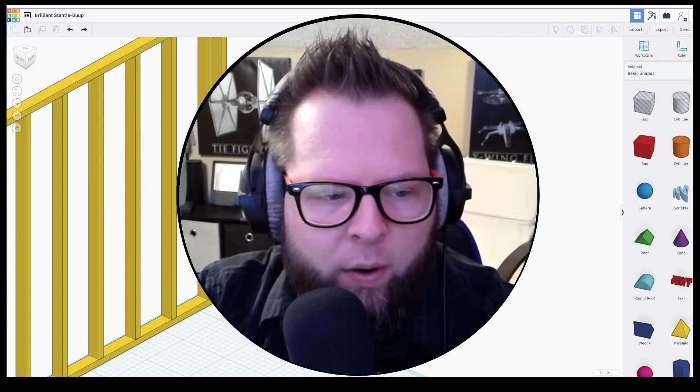What we're going to do is a real simple door opening. We're not going to focus too much on dimensions in this video. I'm just going to do a basic opening, assuming maybe I'll build my own door or have my own plan for how I'm going to cover that. So let's go ahead and get into our door.

I'm going to go ahead and illustrate something for you real quick. If you did what I did in video 1, where I tried to demonstrate the different view options, you see over here on the left you can switch between perspective and orthographic. I'm in orthographic view right now.

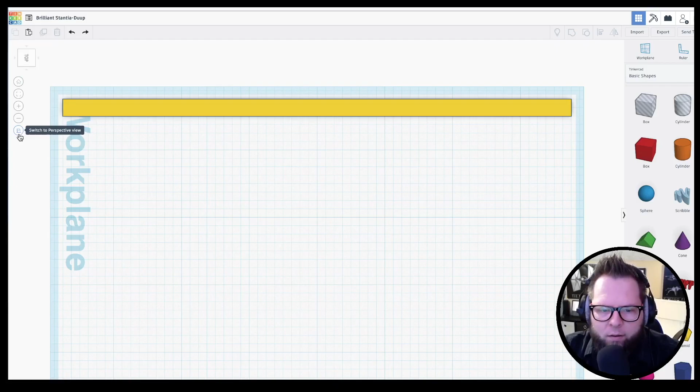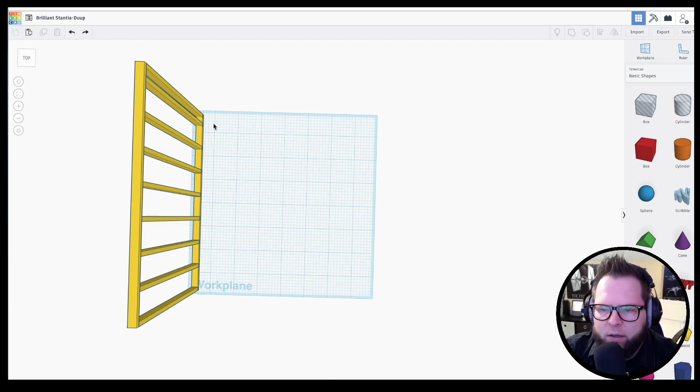If I were to change that right now, look at that—it's like I'm hovering over it, like I'm floating in the air over top. I think I illustrated that a bit in the first video, but it's become so much more obvious now that we're dealing with more height. It'd be very difficult to line things up and tell that this board on top is actually bigger than, or the same as, the board at the bottom. Our brain tricks us with perspective into knowing that's closer and that's further away. But we want everything to line up correctly without relying on our eye for that. So I'll switch to orthographic view, and you can see it doesn't matter where I'm viewing it from.

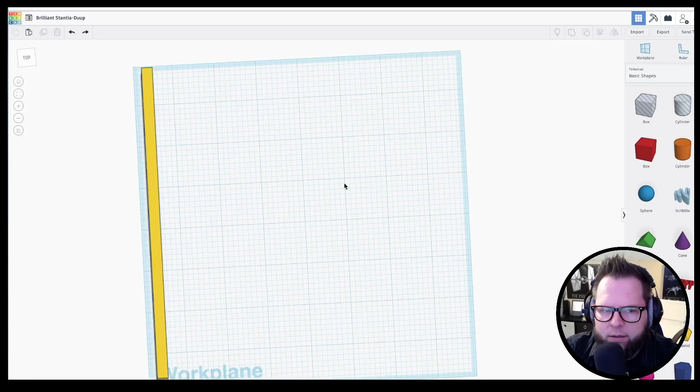Now, if I'm viewing at an angle, yeah, it's going to look a little weird. But when using top, right, or left views, orthographic is going to be so much better for us.

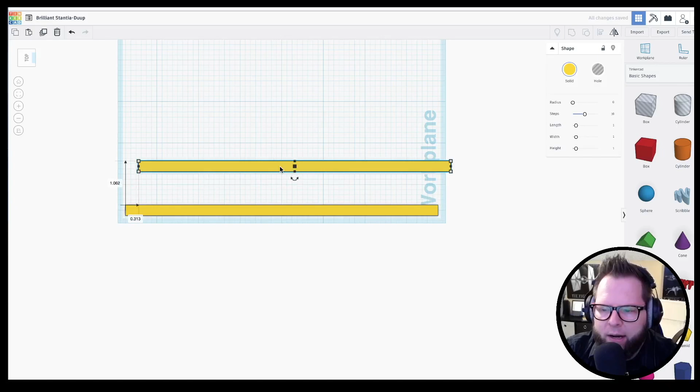First thing you want to do is go ahead and highlight the whole thing. Remember, these are still separate pieces, so if I were to click and drag just a single piece, I'd leave all these other pieces behind.

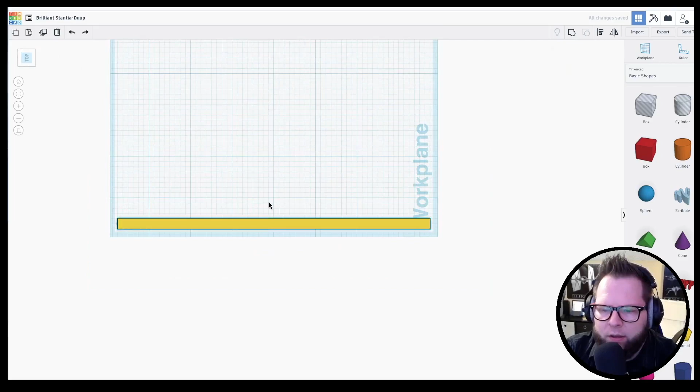Oh, looks like I have a duplicate there. Wow, that was an interesting surprise. I'll delete that, I don't need that. Yeah, that's what should have happened. I'll undo with Control Z. So again, I'll highlight the whole thing and then click duplicate.

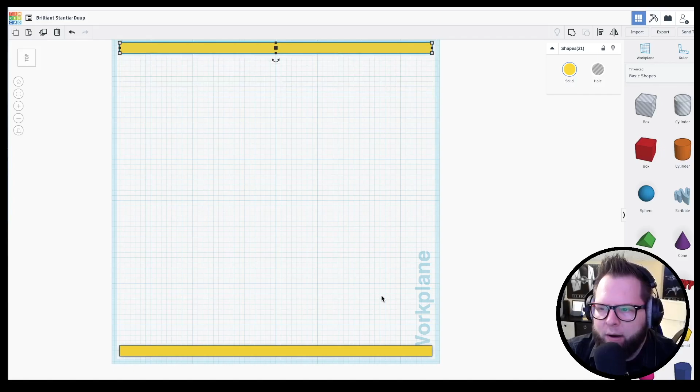Then I'm just going to use my arrow keys and push it over. I'm not going to go left and right, just up and down, because I'm going to use this wall on the other side. It'll probably end up around there—I might need to move it when I'm done to get it in the right spot.

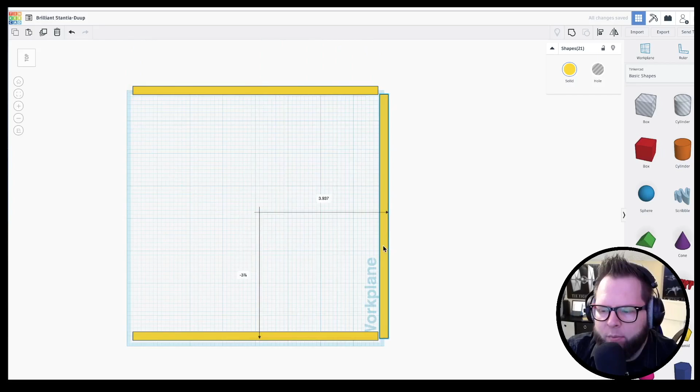I'll go ahead and highlight this and duplicate it as well, then change the angle to 90 degrees. Now I'm just going to click and drag and butt it up against this wall right here. Oh, before I do that—oh no, it's still all selected, so we're good. I'm going to change the color of it to, I don't know, how about this brownish color?

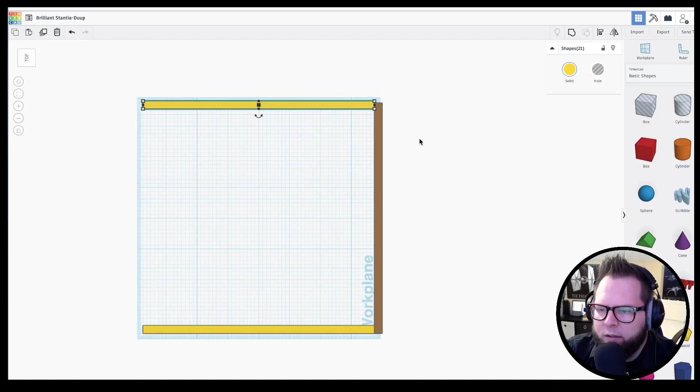Yeah, that's cool. I'll highlight this one right here and move it like right there. Perfect—so that's how my walls are going to butt up to each other.

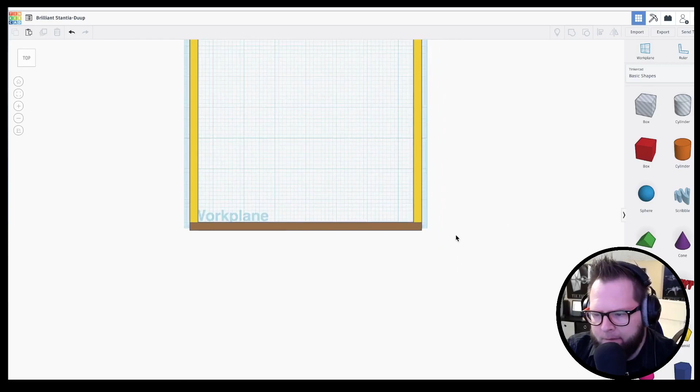Actually, I wanted this wall—I wanted that half stud, or that half distance kind of thing, off on the other side. So let me highlight just that one. If I go to there, it should highlight. Yep. Then I'm going to rotate again. Ooh, right here—if I just type in 180 and push enter, it rotated. So now that stud that's closer is over there.

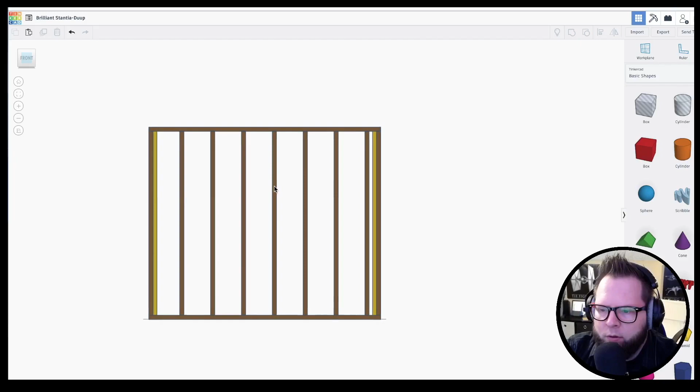Let me go to the front view and zoom in a little here for you all to see. Now on my paper, I have that little half stud on the right. I keep calling it half stud—the stud that is closest to the end stud is off to the right, and so I want it to match what I have on paper.

So if I count, I have that one, and this one is in the same spot. The 3 on the right are going to stay where they're at. The one all the way to the left, I'm going to keep it where it's at. The second one stays where it's at. The third one, this one gets moved over.

Now I'm not exactly sure where it gets moved over to. Did I duplicate this again? There's like an extra of each in there. That would be weird. Yeah, there is. Oh my goodness. So I'll just select. Okay, there isn't of that. I bet I did that when I built the thing.

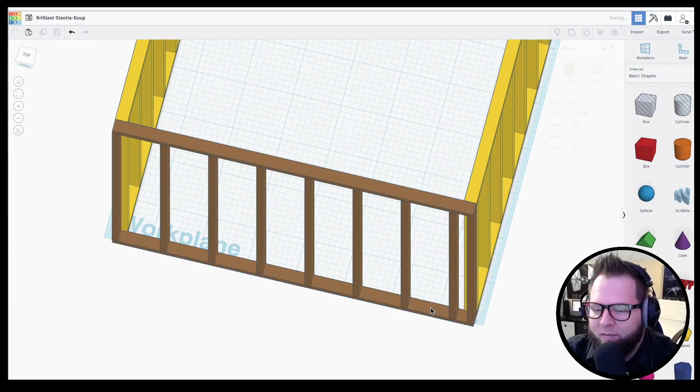There's like duplicates hidden in there. Okay, there's a hiding one. Is there one in here? Yep, there's a hiding one. Is there one in here? Yep, I must have hit duplicate. How about this one? Yep. Okay, how about the bottom plate? No. Oh yep, yep, okay. I bet that happened to this one over here too. Do I have a duplicate in it? Yeah, I do. It's okay, it's not going to make a difference.

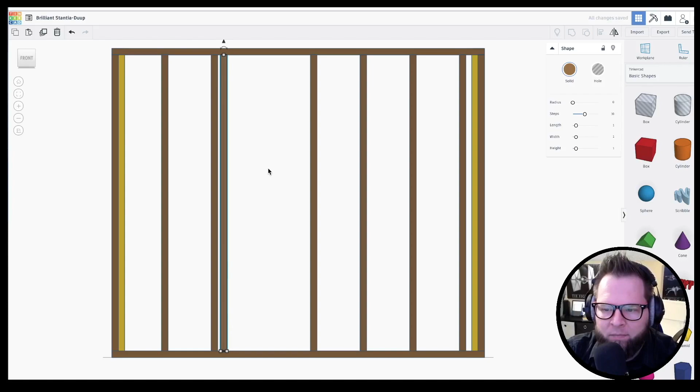So what I was about to say was that these 3 on the left, this one of course stays where it is. That one stays where they're at, and this one is going to have to move. So I'm going to move it over. I don't know exactly yet how close it needs to be. I'm going to get rid of this one, and then that one stays right where it is. So actually that looks pretty darn close. I think this one was only 2 inches. Yeah, I think that's exactly where it's supposed to go.

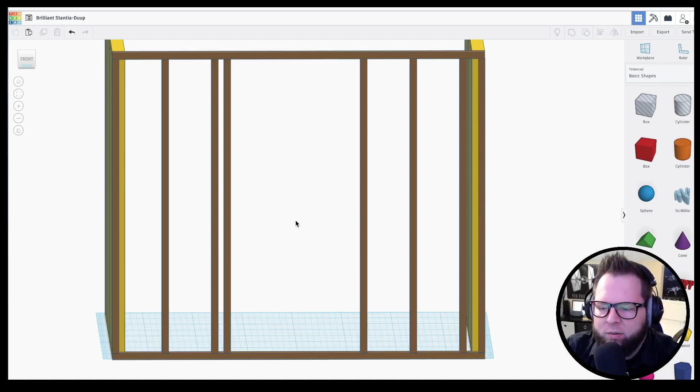So like I said, we're not going to spend too much time on scale and measurement, and really just kind of give you an idea of how we might frame a door. So we would say, okay, well, we want this door here, and now I need to add a header, and I also need to add some trimmers and maybe some stuff for framing in the door.

All right, so the thing I'm going to do is I'm going to go down here and click that one. I'm going to say duplicate. Don't use your arrow keys on this part. You're going to need to click that little cone and drag it up, and we'll figure out. Now the way I'm going to do this one is I'm actually going to change this distance here to like 2.5. Yeah, and I think 2.5 is probably decent for a door.

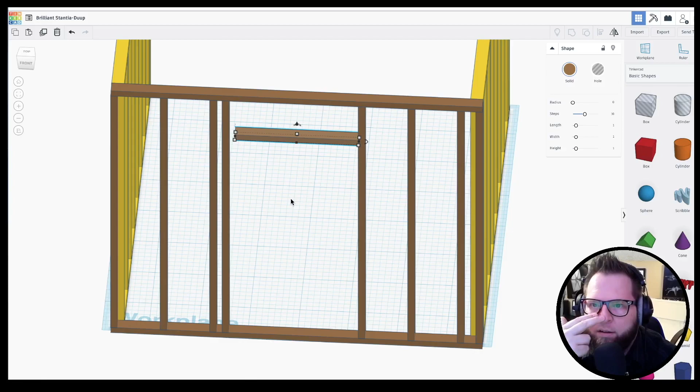2.5 inches in... 2.5. Well, that would be 32 plus 8, that's like 40 inches. So I think that's like a 40-inch opening, if I did the math right. And so I think that's about the width that I want. So I'll go ahead and bring this guy in to where it should go.

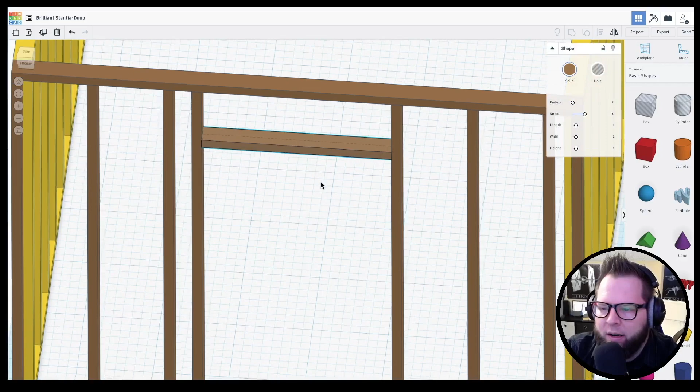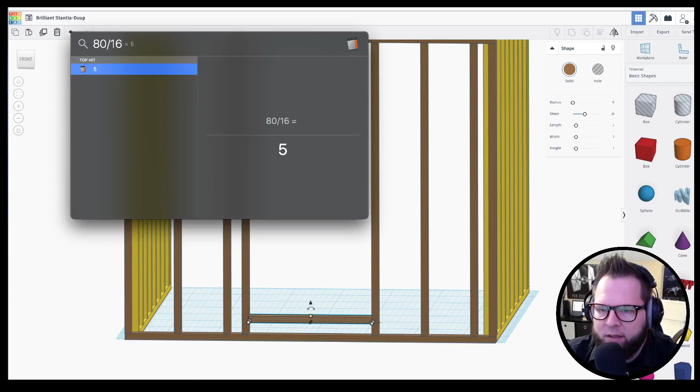There we go. Okay, and now I want to have some 2x6s. I got to get the height right as well. I'm going to say I want the height to be 80 inches. So what's 80 over 16? 5, because a 16th is an inch, so it's 5 feet. Okay, so I'm going to have it.

So if I push D, it's at the bottom. Then if I click this little cone, not the rotate part, if I click this little cone, you'll notice it's measuring from the ground right here. So I'll say 5 feet... is not 5 inches. 5 feet, I would need to take that... no, I need it more than 5 feet. 80 inches and 16ths, I already did the conversion.

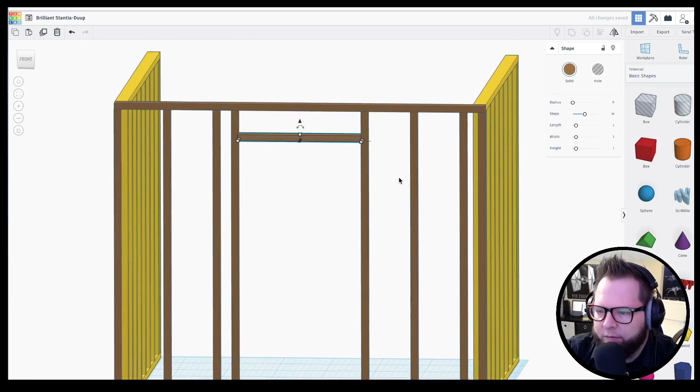So I think that I want it to be a little bit higher than that, though. I think that's about where it's supposed to be, 5.5, to be honest. I can always go to my paper, and actually that's probably what you should do if you have a paper, just measure it and then put in the dimensions that you have on your paper here on the program. All right, so let's view it face on.

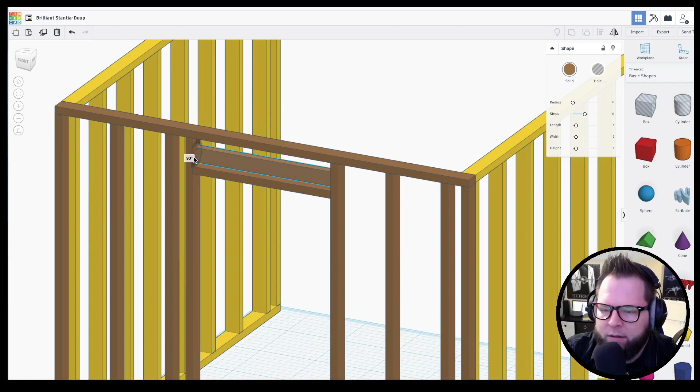Okay, I'm going to duplicate this guy. So I got this one selected. I'll duplicate it. I'm going to pull it up just a little bit so I can work with it. I'm going to zoom in a little bit and then change my angle. And I want to change its orientation by 90 degrees, just like that. Okay, looking good so far.

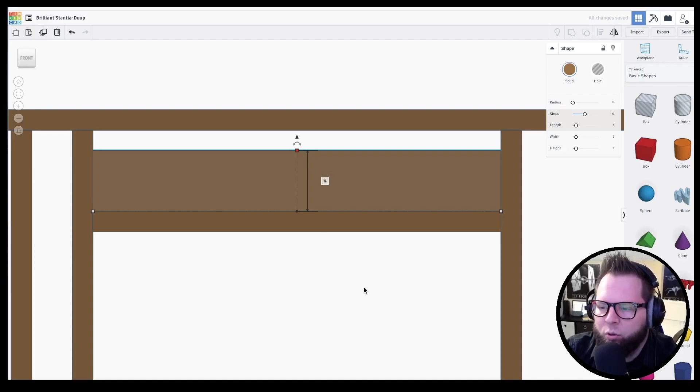Now, if a 2x4, remember each 16th represents a real inch. If a 2x4 is 1/4, which is 4/16, then a 2x6 would be, I'm just going to go like that, would be 3/8. Okay, so that's a 2x6. And the reason I'm using a 2x6 like that is it's going to be much stronger in that orientation.

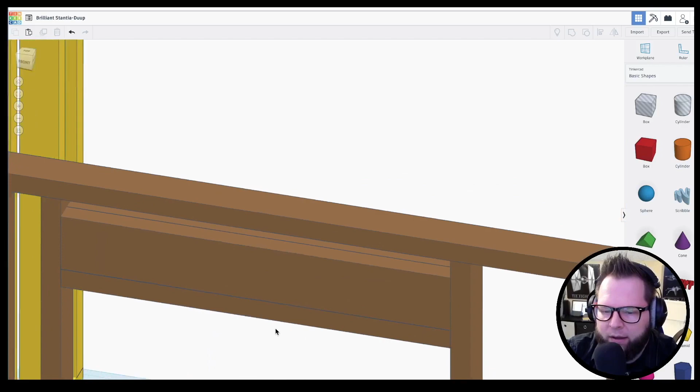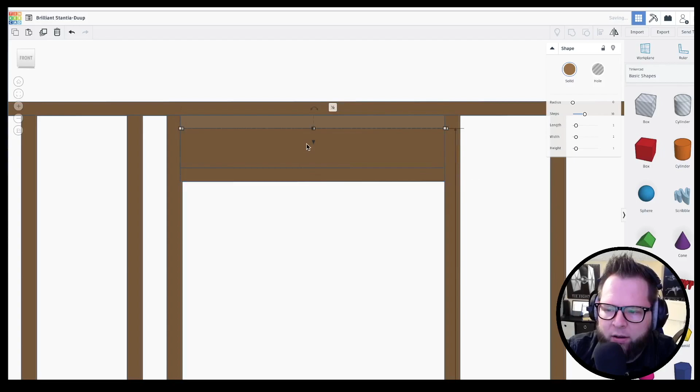Okay, so I have a 2x6 like this. I'm going to duplicate it, and I should have another 2x6 as well, so you have those two 2x6s butted up against each other, and they're going to be strong that way. Now, if I ended up with a lot more room between the header and the top plate, I might use some cripple studs, small studs to put in there. But it looks like it's almost exactly a 2x4 width, so I'll just duplicate this and bring it up there. And look at that, it fits almost exactly. It actually does fit exactly.

So that's how I would probably frame it on the job site, since it's going to have to transfer the weight from this top plate down into that header. Notice that right now that header's not resting on this 2x4 right here, which is part of the framing for the door. That would be nailed in from the other side of this stud, but we don't want nails holding the weight. We want the wood to be holding the weight.

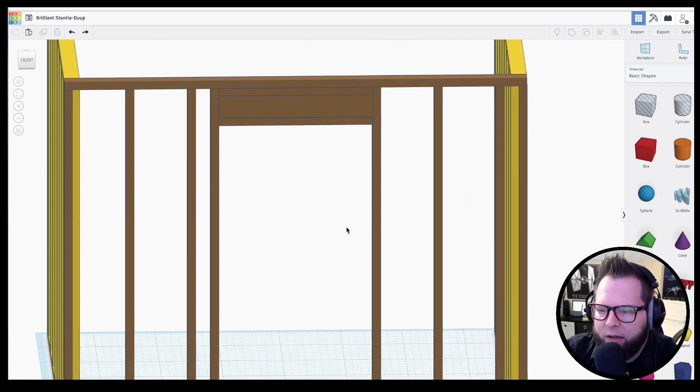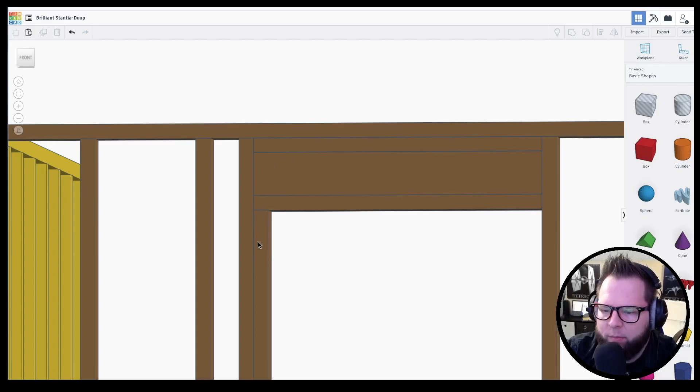So we want to actually put in some trimmers, and the trimmers are basically just studs. I'll duplicate this stud, move it over, and then I need to change the dimension so that it goes right to the bottom of that piece right there. I'll zoom in so you can see. Now the weight is going to transfer down into this trimmer piece all the way down to that sole plate. If I get a front view, perfect.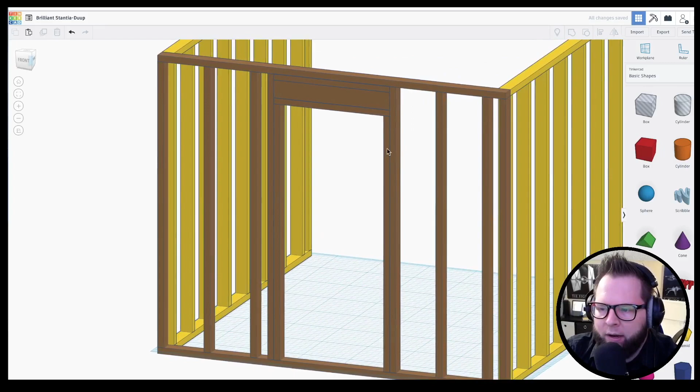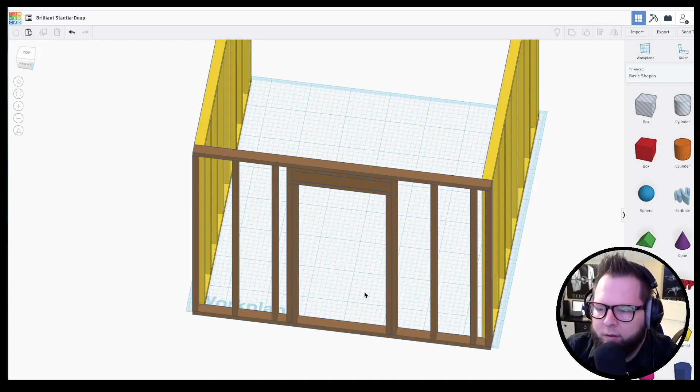I'll duplicate that so I have another trimmer on the other side, and that's pretty much all there is to it. Now you have your door opening. I have a good amount of wood that I can use here to secure my door frame to at the top and on the sides. I'll probably at the end cut this part of the sole plate out, but I'll leave it there while I'm doing construction on the building, since I don't need to take it out until I put my door on.

But that's pretty much it, guys, for this video. Again, dimensions are all going to depend on the size of the door that you're using, and so where you put it in here and how you do it is going to really depend upon what you're using.

It looks like I'm maybe not quite on center with where my door is, so I might need to change my plan a little bit. The one thing you would not really want to do, though, notice that if I was lazy framing this, I could just move this whole thing over like that. The problem is that now I don't have them 16 on center. It probably would be fine if I did that, actually, so I probably could move the door to exactly where I needed it, just as long as I didn't end up with a gap greater than 16 inches between my studs, because that would compromise the strength of the building.

All right, so that's pretty much it, guys, for this video. I hope you enjoyed it.

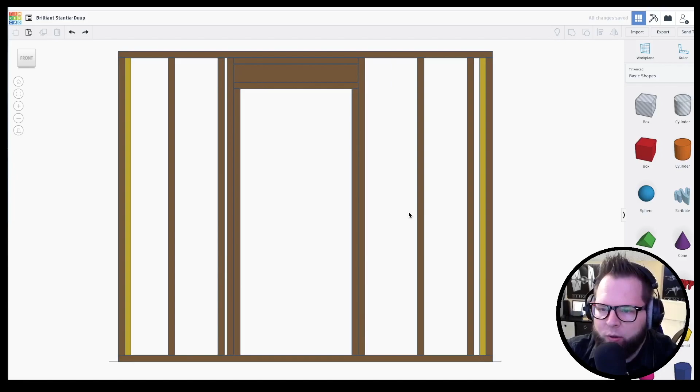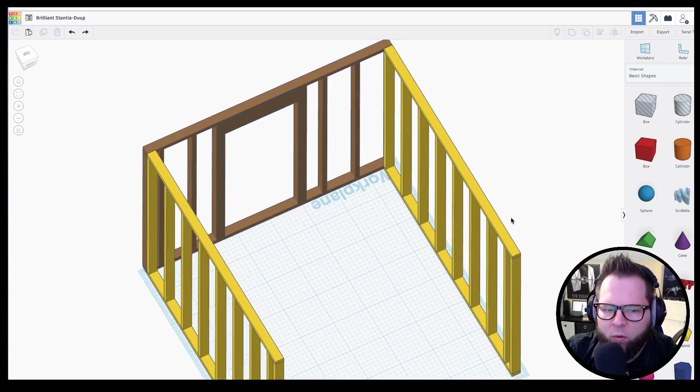That should be where it was. Yep. And in the next one, I will go ahead and do the window wall, and then we will probably put some rafters up that we can attach a roof to. I'll probably just do a basic, very simple pitched roof without any kind of gable or anything like that. And then I'll also show you how we might add some additional pieces.

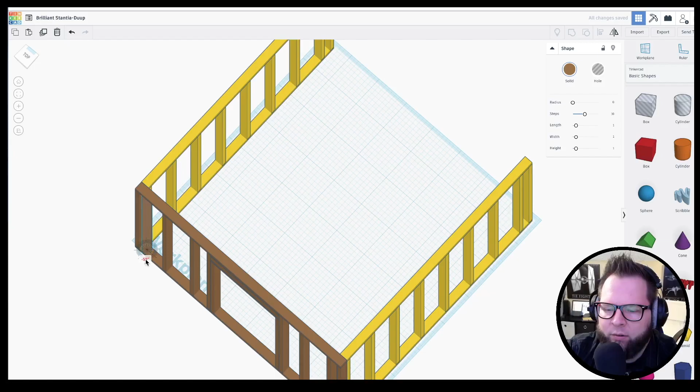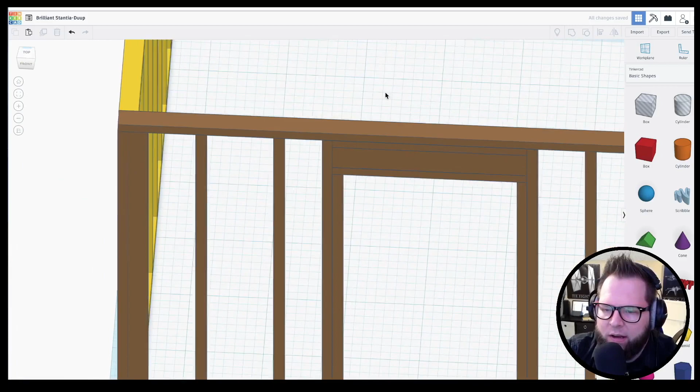Like you might want to add an additional stud in here. I'll just show you that now as a preview, to where I would duplicate that and then maybe spin it around 90 degrees, and then have it right there. Something like that, right? So yeah, there's some additional pieces you might put in. I've heard somebody call that a California corner, to put that stud in another direction like that and put it on there like that.

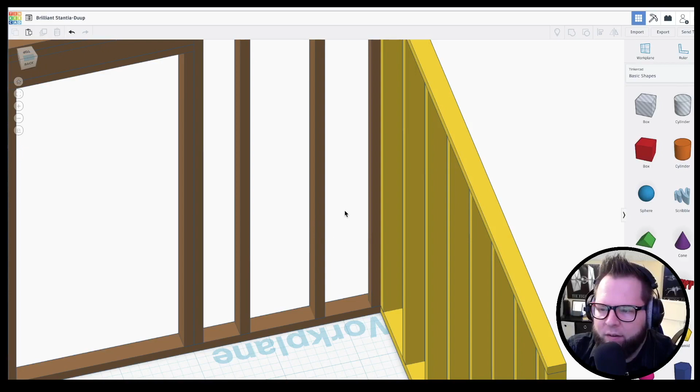I'll talk about why we did that in the next video, or maybe I'll save that kind of stuff for some little tips and tricks at the end. But I hope you enjoyed it, and I'll see you in the next video.